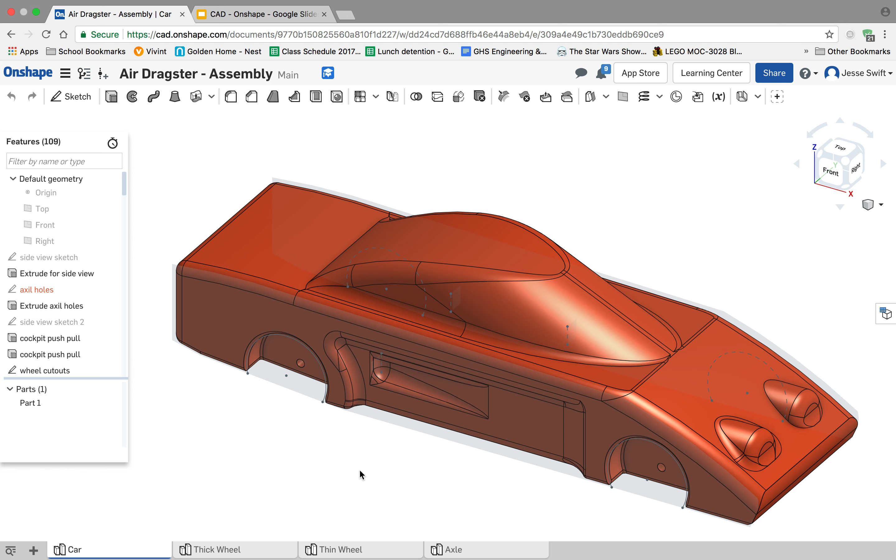Today we're going to continue learning about the assembly options, and what we're going to do is build this car. We've got a thick wheel part here, a thin wheel part, an axle, and then the car body. We'll put all of those into an assembly, and then not only will we put them together, but we will also learn how to use the mate features, and that's really making the parts stick together and actually revolve around the axle.

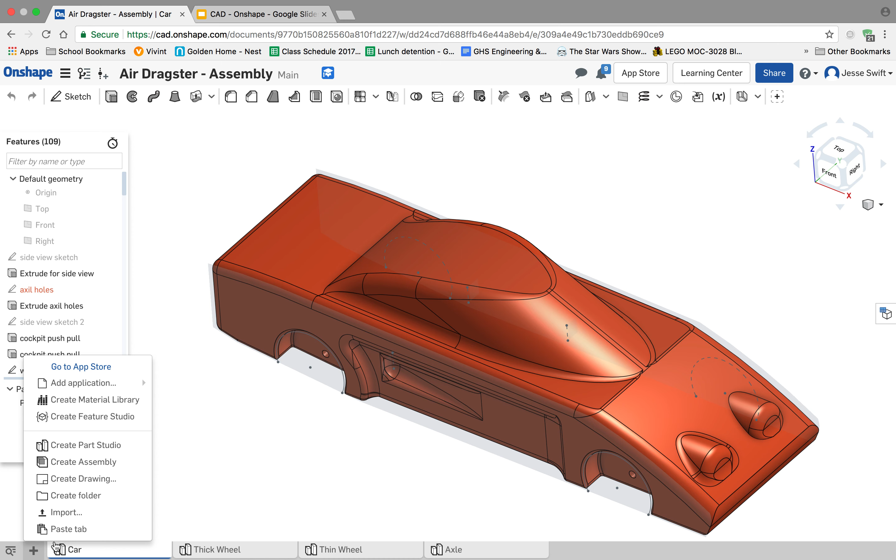So getting started, we need to make a new assembly, create assembly. Every time you make an assembly, it says, hey, what do you want to put in there? So we'll use the insert button. Let's start off. We're going to obviously insert the car body, and we'll just throw that down right here.

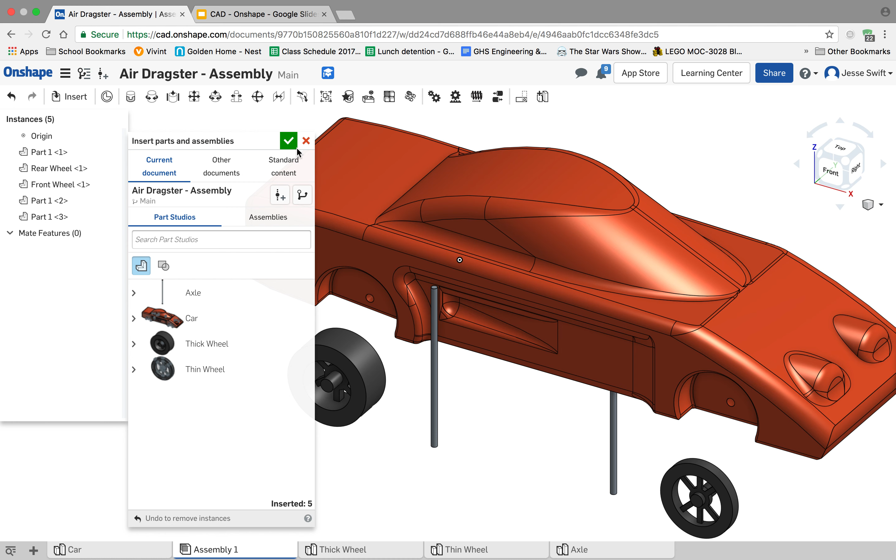We'll insert a thick wheel, we'll put in a thin wheel, and then we'll also put in an axle. We actually need two of those axles, so let's bring two of those in. We do need another thick wheel and thin wheel, but we'll add those a little bit later. Now that we've brought them in, we can say we're okay, we'll hit the green saying good, we've got what we need in here.

Alright, now the first thing we want to do is, you can see they're all in really weird places, and that's fine. What we're going to do is we're going to start using these mate features.

The mates are kind of like ways to have your parts stick together, and they can actually interact in different types of movements. So there's a fasten mate, which is just sticking something together. You have the revolve mate, and that allows something to rotate. You have the slider mate, as it says, you can slide it. There's a planar mate, so that might be two flat surfaces that might interact. We also have a cylindrical mate, so that might go up and down while also revolving. There's a pin mate, so you might have a slot, and then there's a parallel mate and then a ball mate. Today we're just going to use the revolve mate and the fasten mate.

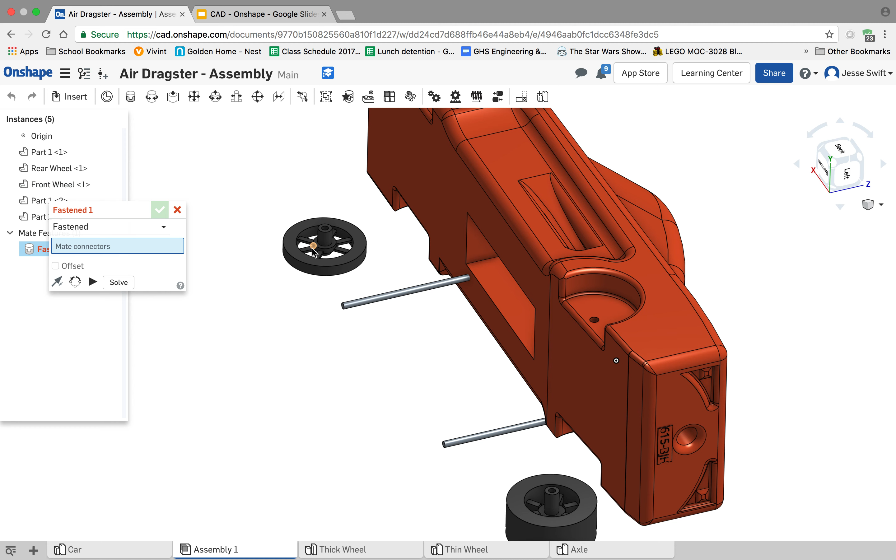So when you click on these mate features, it's going to ask you what parts do you want to mate and exactly where do you want to mate them and make them connect. So the first thing we'll do is we'll mate the axle into the wheel.

So we're going to click here at the very end of the axle. We're going to zoom in, click that. That's going to be the first part that we're going to mate. It says mate connector part 1 of 2. Then we're going to zoom out, and then now we're going to

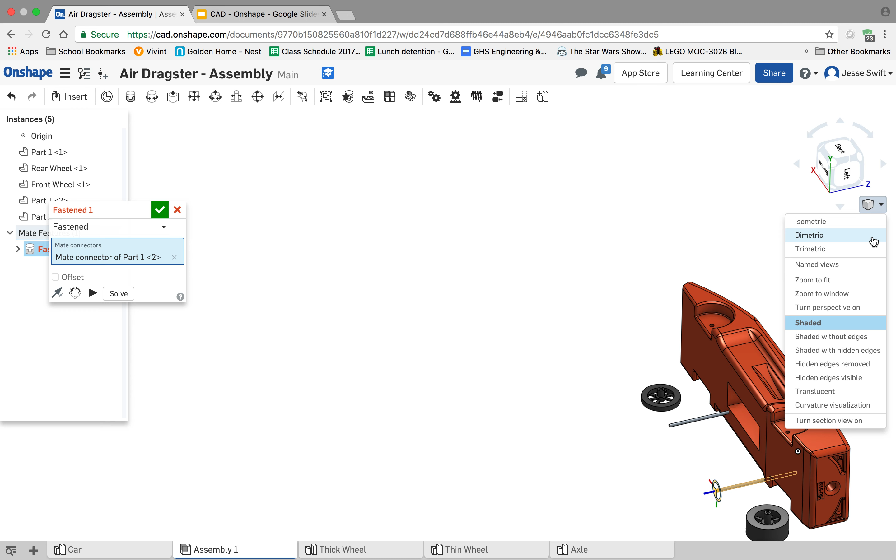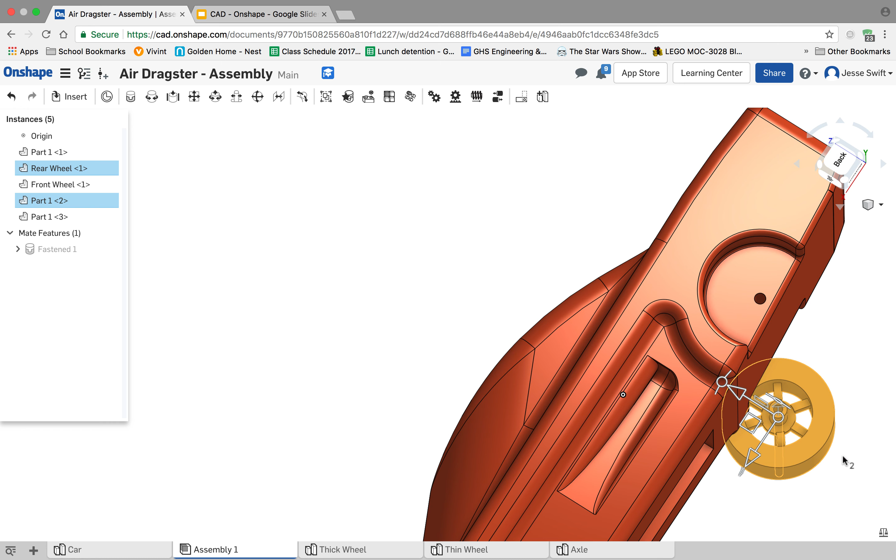revolve around, and now we're going to mate it here inside this wheel. You can kind of click on that surface or even get more exact, a little deeper inside the wheel. If I do that and we say OK, you can see if I zoom out and rotate, that it mated it, but you can see that it mated it in the wrong direction.

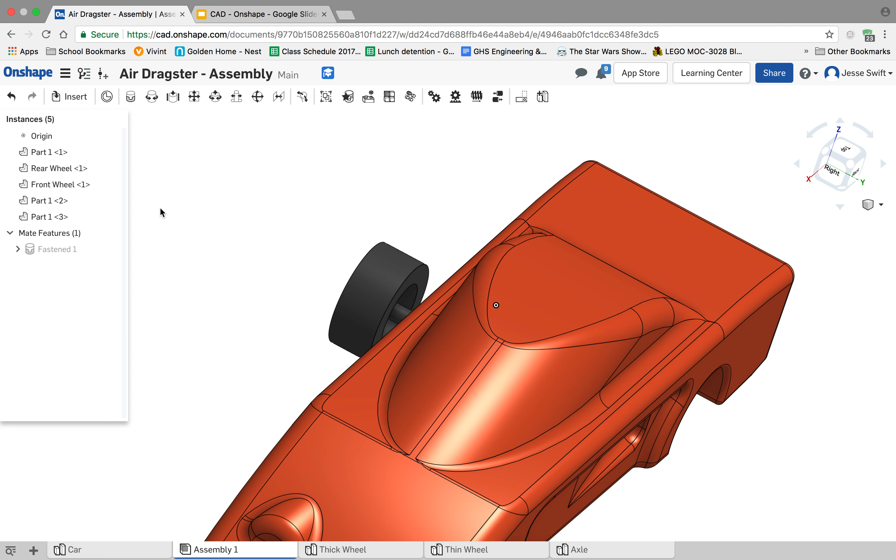So what we can do is we can actually come back here to our fasten, edit that, and then now we're going to change these arrows. That arrow lets you kind of pick the direction that you want it mated. Now that we have it mated in the right direction, you can see that we've got the axle sticking out of the hole like it should.

Alright, now our next part, what we're going to do is, the next mate feature we're going to use is we're going to use the revolve mate, and that's going to actually make it start to spin.

I'm going to click on the revolve mate, and it's going to ask where I want to revolve. We'll pick right here, and revolve it on that face of the wheel. Then we're going to match it up to the body where we want that to revolve. I'll click here, zoom in, and click on that circle - that's going to be the other mate.

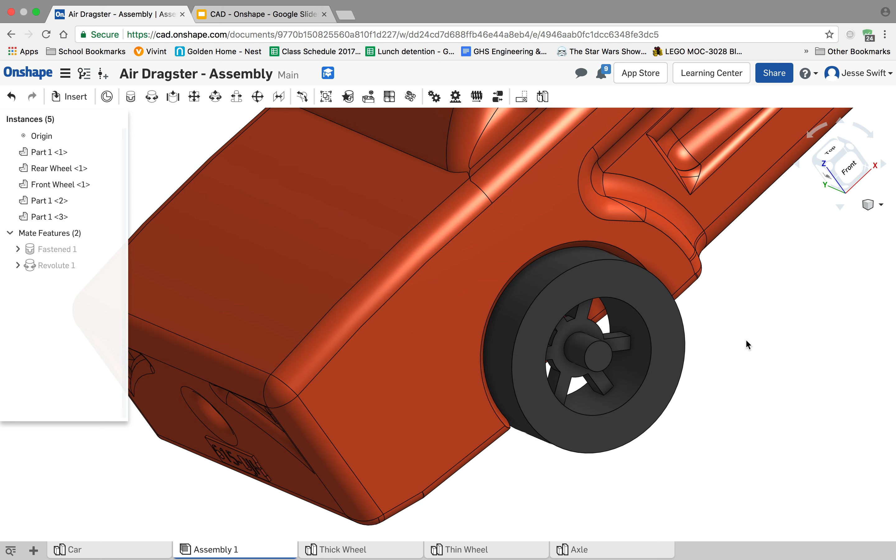Now that I've done that, I can click OK, and it moved the axle and the wheel into the car body. You can see that the axle is now sticking out the other side.

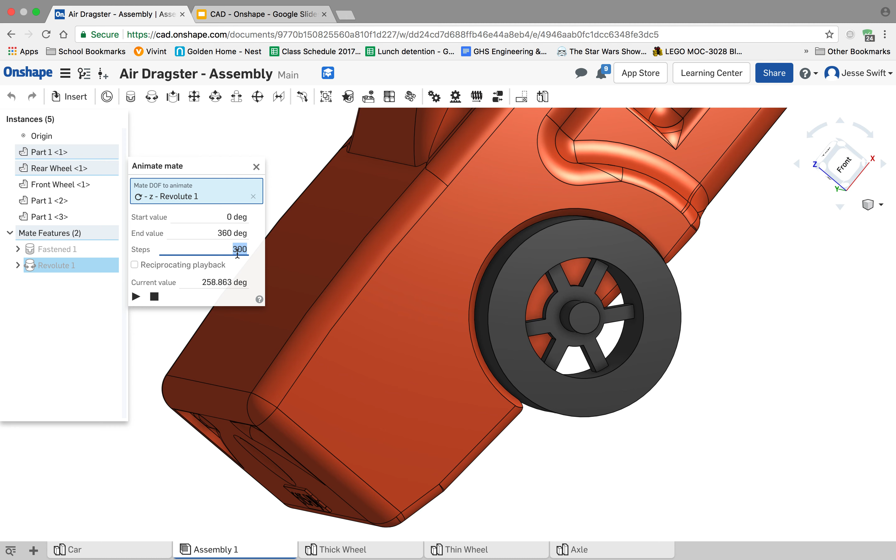Now I can right click on this revolve and actually animate that. If I press play, you can see it's revolving, rotating like it would in real life. You can change the number of steps - if I make this 20, it should go a little faster. You can animate that however you want.

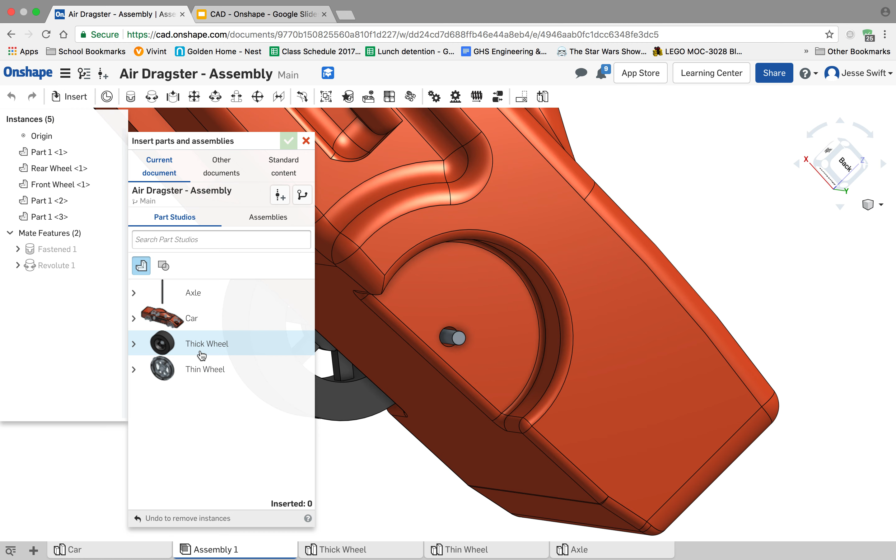So now that we got the axle fastened, we're revolving it in the axle. Now we'll need to insert another thick wheel for the back. We'll put it right here and say OK. Then we're going to fasten that to the other side of the axle.

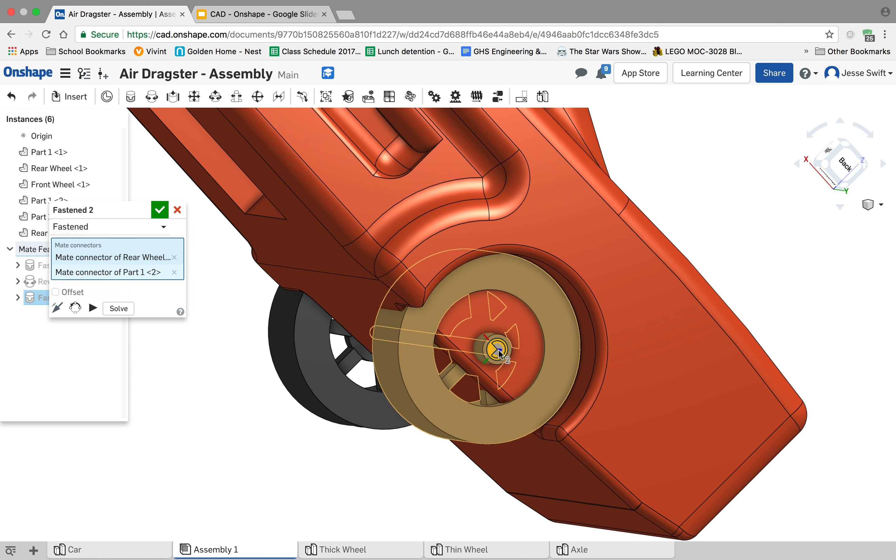So I'm going to fasten. What do we want to fasten? We want to fasten that part of the wheel right there, around the end of the axle here. And if we say OK...

That worked pretty well, but I think we need to flip that fasten. So I'm going to edit the fasten and change the arrows on that. Click OK, and now you can see it's in there and stuck onto that axle.

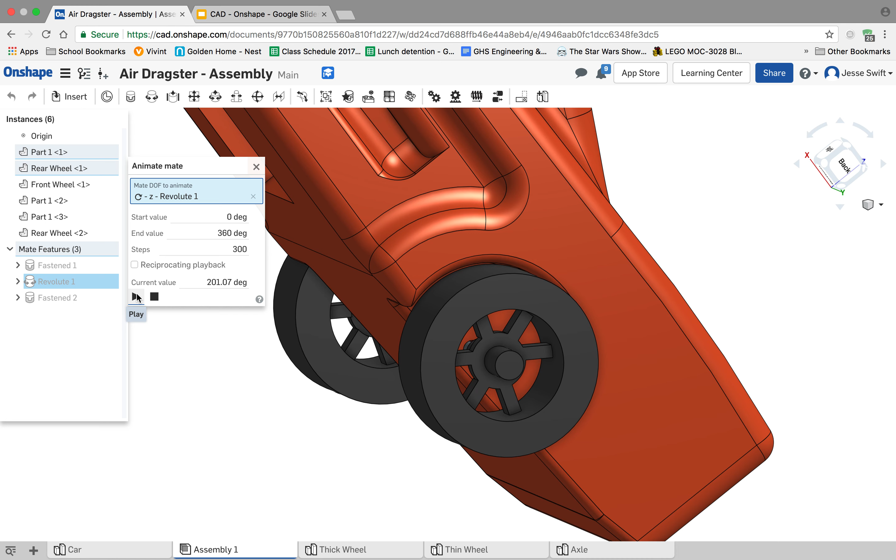Now again, I can go back to Revolve, animate it, and if I press play, both wheels are now fastened to that axle, and it's rotating like it should and would in real life.

All right, so now we got the rear wheels done. We're going to go around and do the same thing for the front. First thing we need to do is fasten the end of the axle here into the wheel here. And again, we can zoom out.

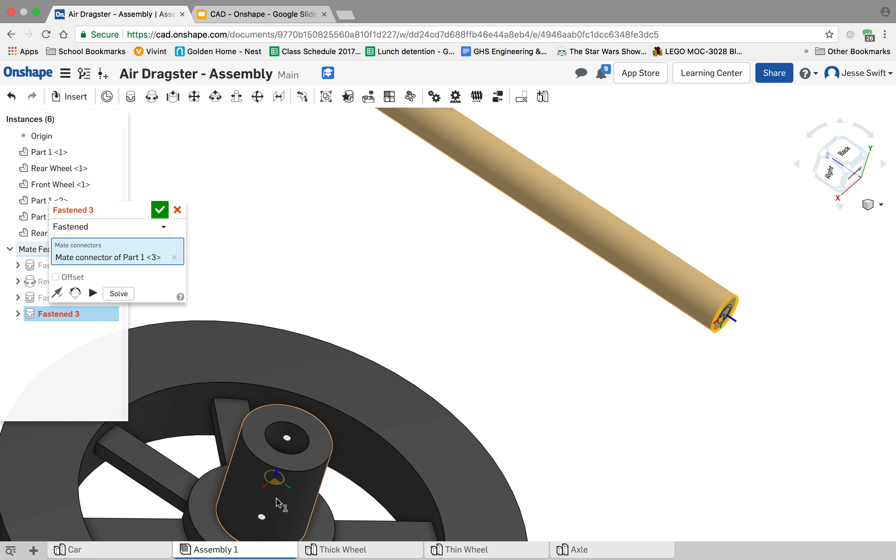We can see, oh hey, that's not the right direction. We'll click on the arrow, make that the right direction. Looks pretty good there. Next step, after we fasten that, we need to go and get our revolve.

We're going to revolve the face of this wheel. So zoom in, click on there. That face of that wheel is going to revolve around the axle hole in the car. So zoom in up here, get here on the axle hole, click.

We can animate that through this, double check it. Looks pretty good, and we should say OK. Now we've got our axle moving, attached to the wheel, revolving around that axle hole. Our last step would be to bring that other wheel in.

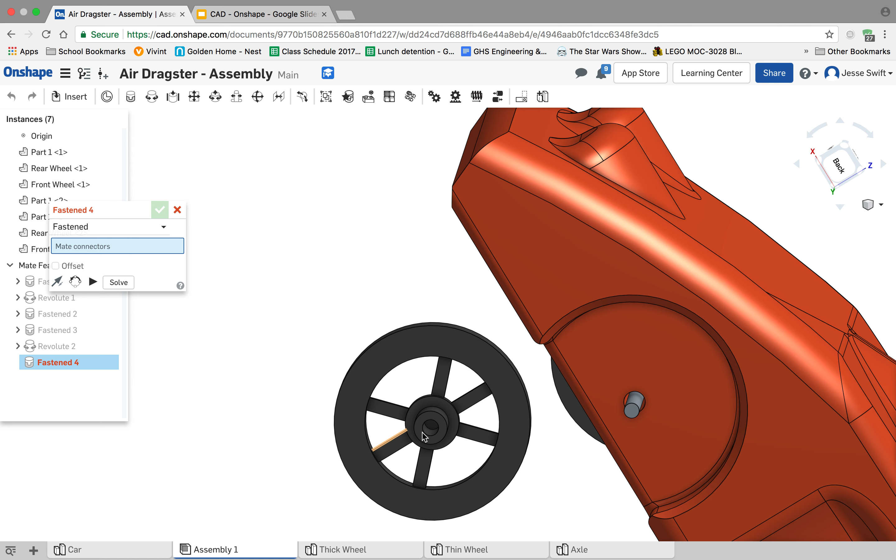Grab another thin wheel, place it right here. We need to now fasten that wheel just like we would in real life. We're going to fasten this part of the wheel on the very end of the axle, flip it, and say OK.

And again, we can go back and animate that revolve too. Now you can see both wheels are rotating like they would in real life.

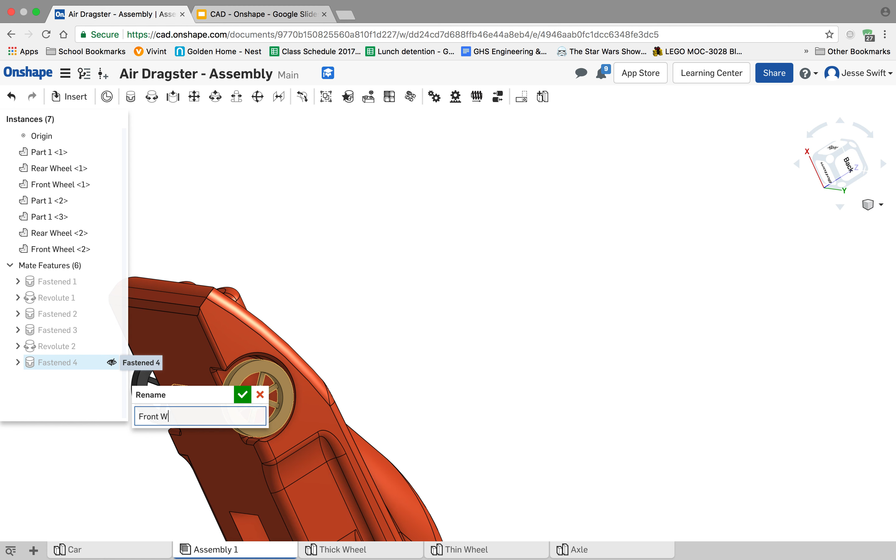If you want to, you could go through and rename these. We could say front wheel rotation, and rename Revolute 2 to rear wheel rotation. So now we've got that all done. You've just learned how to use the assembly.